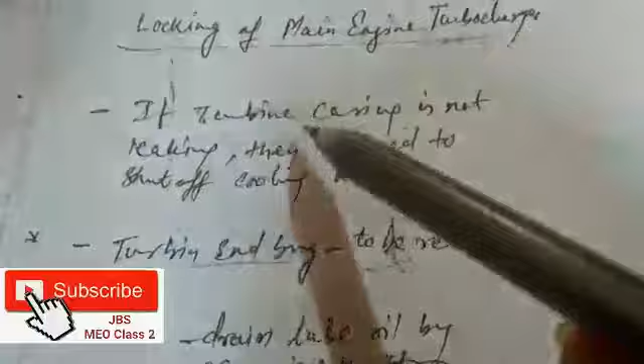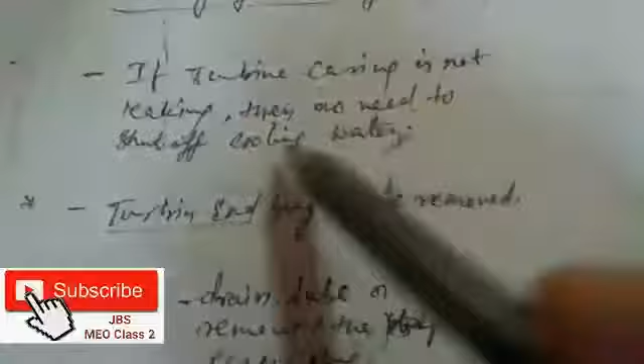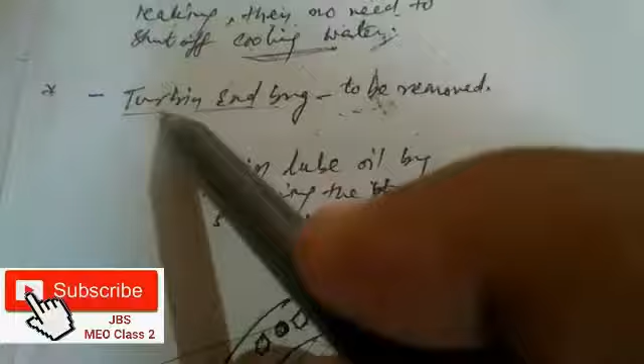So let's go. The first point which we should take care of is, if the turbine casing is not leaking, then we need not shut off the cooling water. And the second point is, we have to first remove the turbine end bearing before locking the main engine turbocharger.

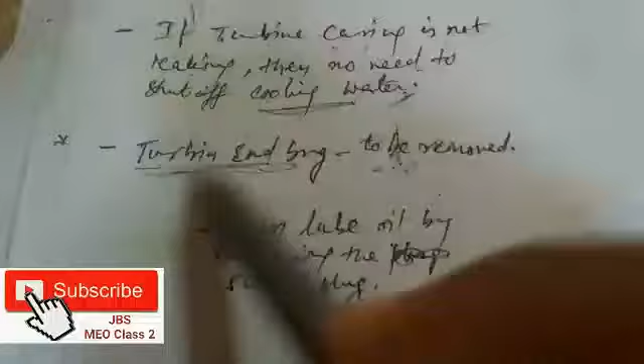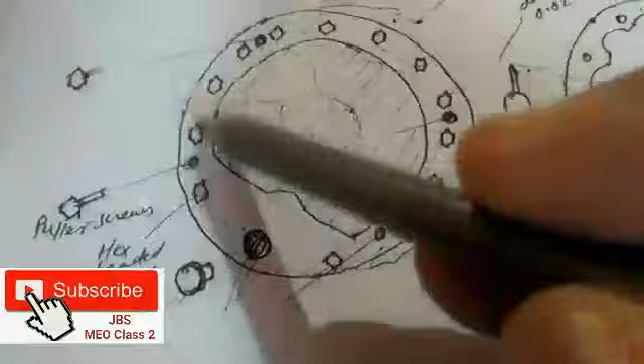So first of all, we will drain the lube oil by removing the screw plug. So here is the screw plug. We will remove it and drain the oil. Now friend, this is the turbine side bearing space cover, and these are the hex headed screws.

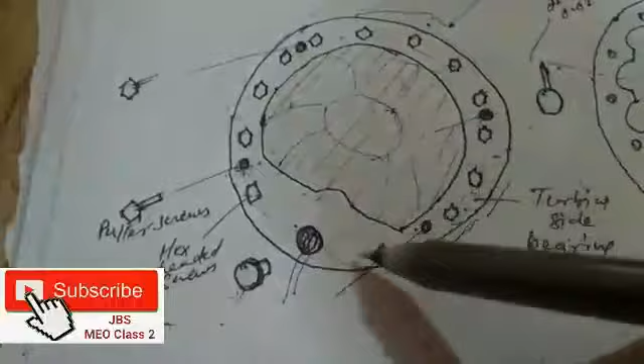And these are the 4 holes as you are seeing, 1 2 3 4. These 4 holes will be having internal threads, and into these we will be inserting the puller screws, and we will tighten them oppositely, and this turbine side bearing space cover will come out.

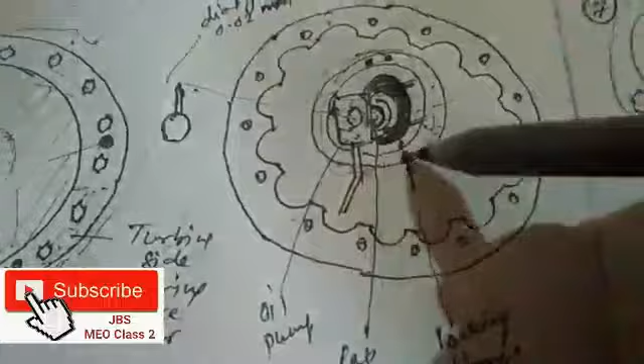After this comes out, the internal will be looking like this. This is the oil pump, and after the oil pump there is a cap nut, and this is the locking flange. Please try to remember this part, because it's a very useful part where locking of the main engine turbocharger is concerned. So this is the locking flange.

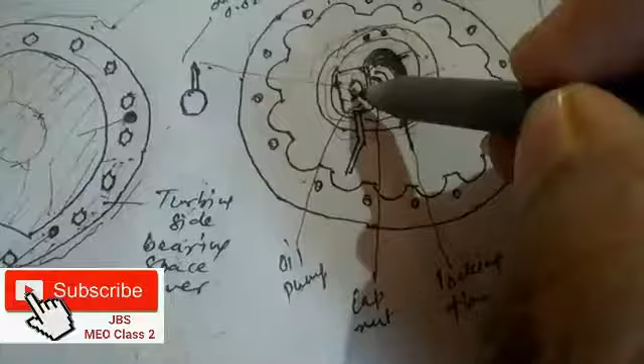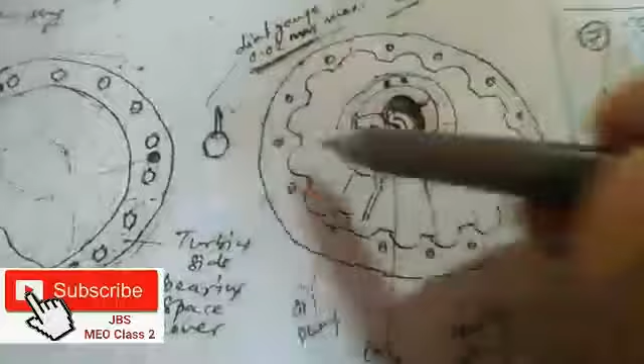And before that, at the center of the oil pump, we will measure with the dial gauge the radial displacement. Max reading is 0.02 mm. That is the radial displacement. So we will measure with the dial gauge the radial displacement of the center of the shaft. Now after that,

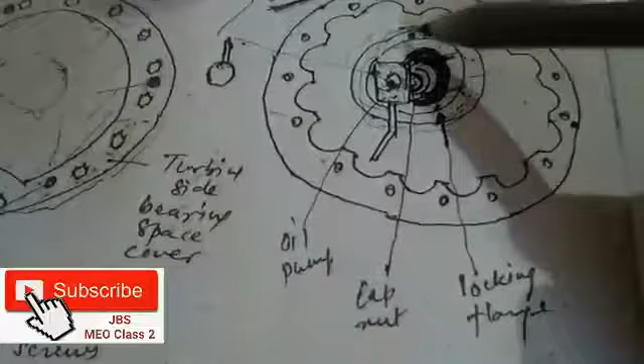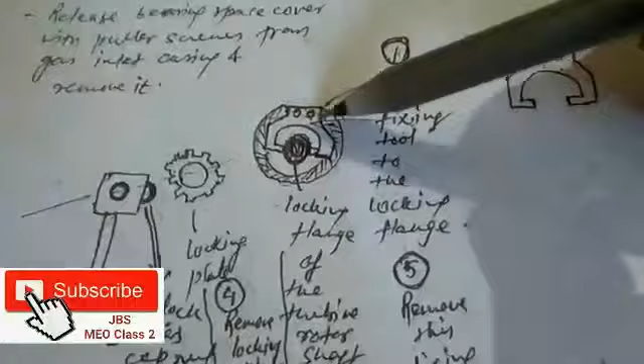now friends, as you are seeing in the locking flange, there are 2 holes here. Here we are going to fit this part. This is actually the fixing tool. Here we are having this locking flange, and this is the fixing tool. We'll fix this fixing tool onto the locking flange, and it will make contact with the shaft.

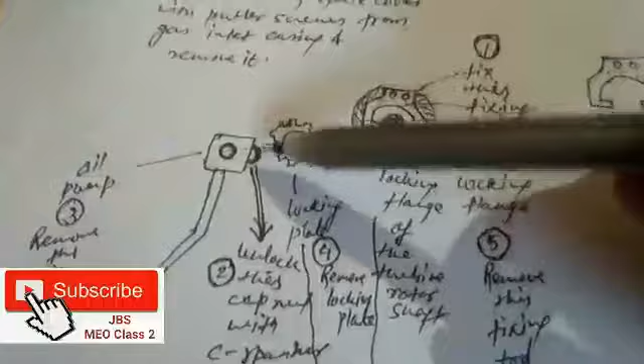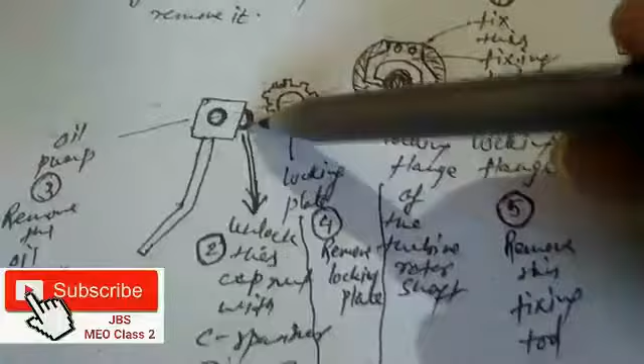Now friend, after that we will open this cap nut. For this, a special tool, the C-spanner, will be required. With the C-spanner we will be unlocking this cap nut, and after that this oil pump will come out, and then we will remove this locking plate.

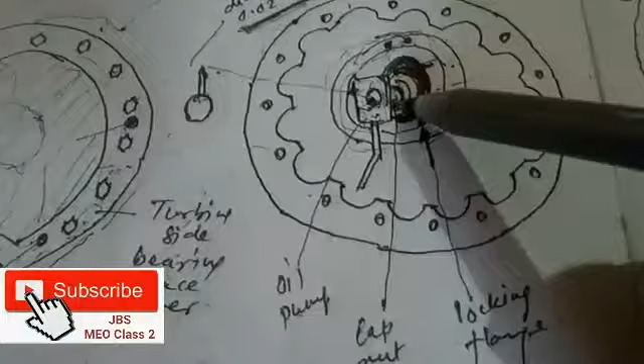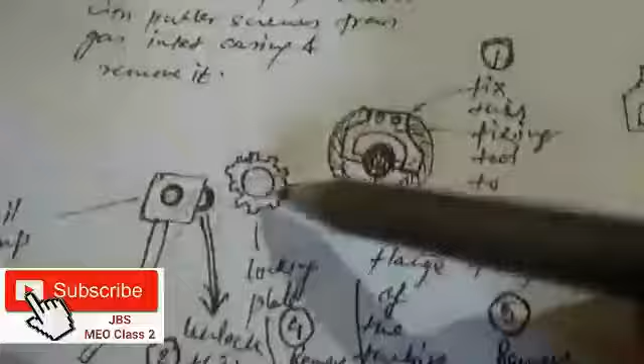So the sequence is here. First we fit the fixing tool here, and that fixing tool will hold the rotor. After that we remove the cap nut and remove the oil pump, and the oil pump will come out. After that we will remove this locking plate, and when the locking plate is removed, we will remove this fixing tool.

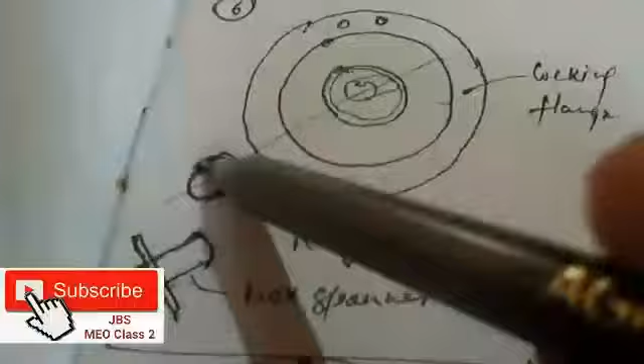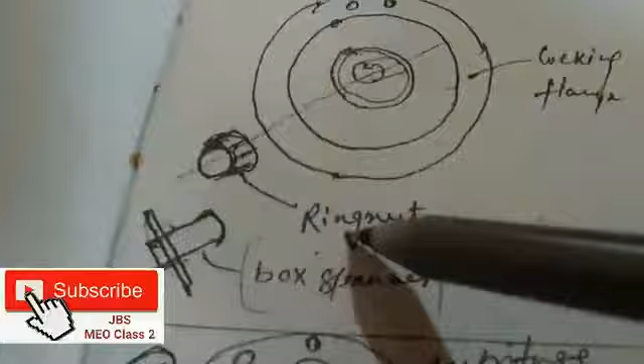Now friends, this is the same locking flange. We have removed the fixing tool from here. We have removed the oil pump. Now on the shaft there will be a ring nut. With a special tool, that is the box spanner with a Tommy bar, we will be removing this ring nut.

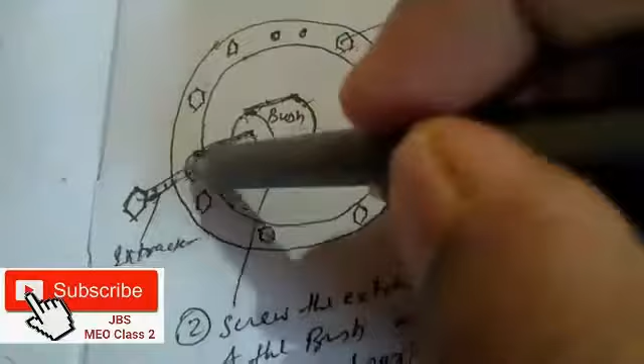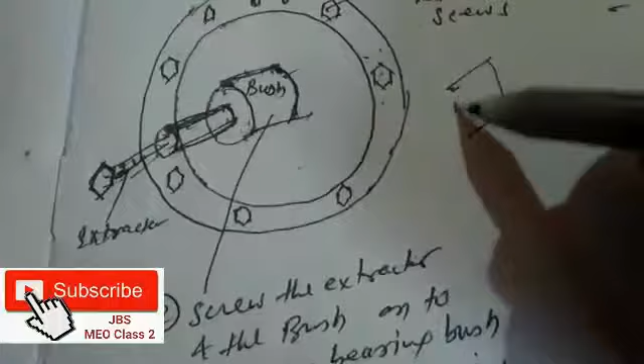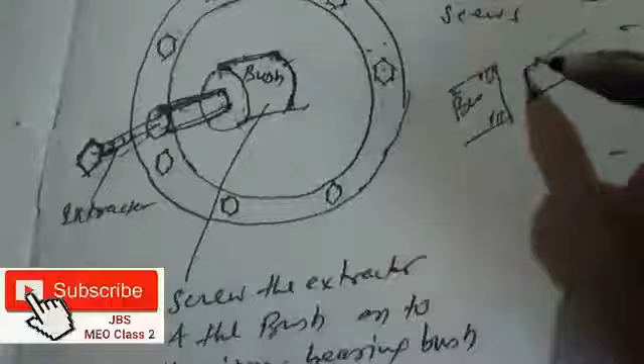Now friend, after the ring nut is removed, onto the shaft we will mount this extractor tool. This extractor tool has a bolt, and this is the bush. This bush will be having internal thread. Now this is the shaft. On the shaft the bush is there. On this bush the bearing is sitting.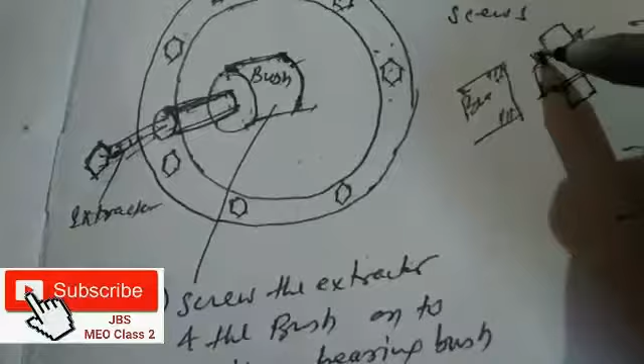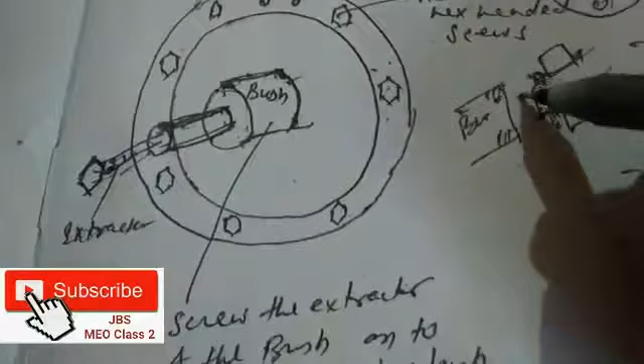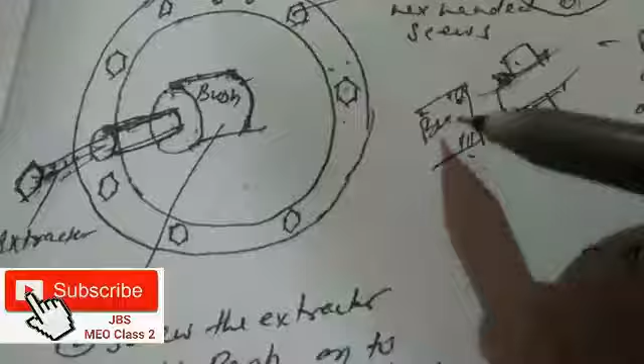So this bush will be having external thread. This internal thread will get fitted onto the external thread of the bush, and when we tighten this extractor tool, this bush will come out. Along with the bush the bearing will come out. So that's what we are doing here, and the turbine side rotor bearing

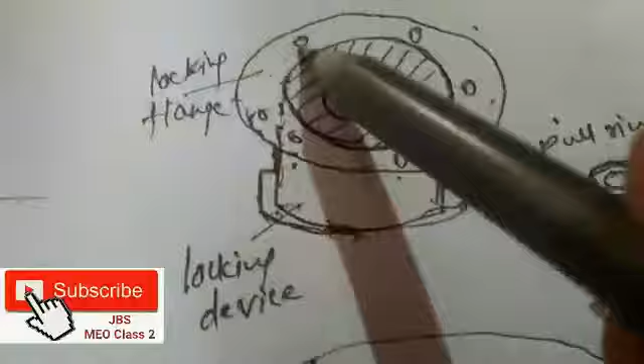comes out. Then we will remove the hex-headed screws of the locking flange and remove this locking flange. Now friends, as we have removed this locking flange and the turbine side bearing along with the bush, we will take this locking flange out, and there is a locking device.

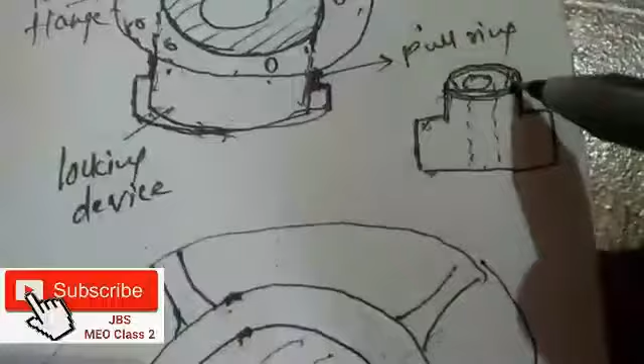Now this is how the locking device looks. It has a step here, and this is called the pull ring. The whole thing is called the locking device. On this we are going to place the locking flange. We are going to press this locking flange onto this locking device, and it will sit over this pull ring.

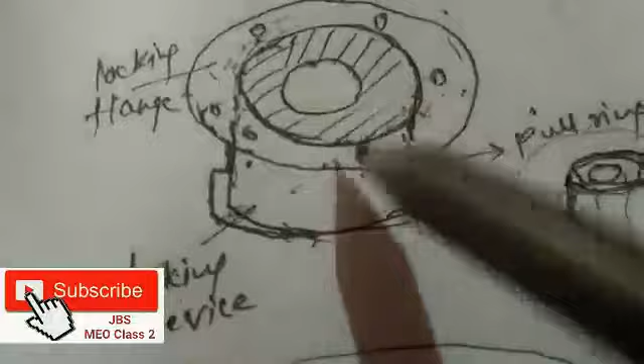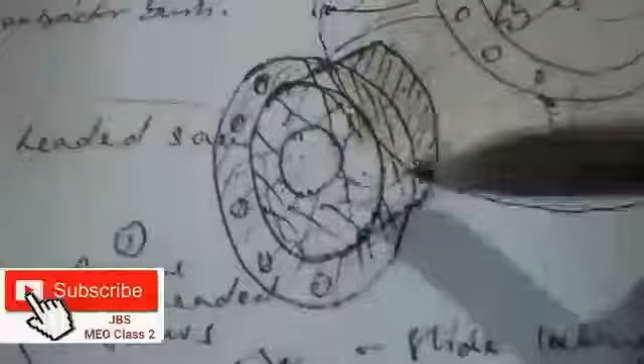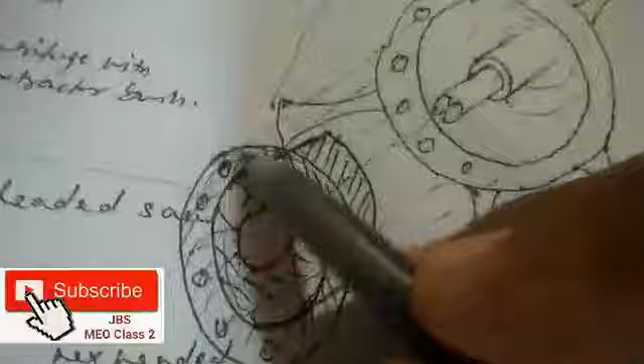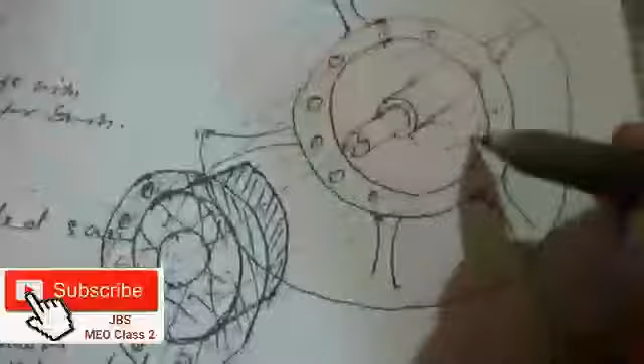After fitting this locking flange onto the pull ring, we will slide this locking device over onto the shaft, and after that we are going to lock it. This locking flange will be tightened over here. After tightening, this locking device will hold onto the shaft along with its grooves, so it will prevent further rotation of the shaft.

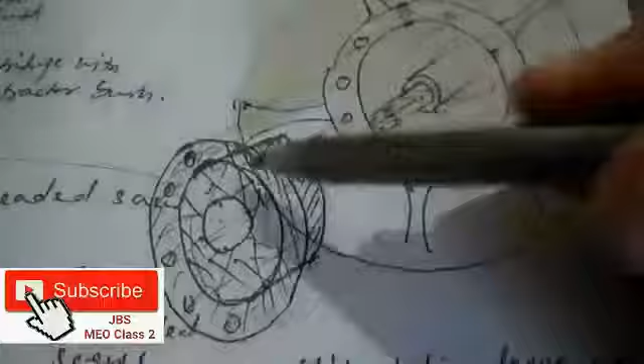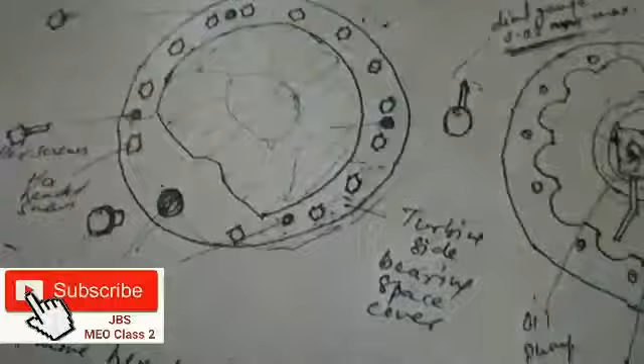After we have put this locking device along with this locking flange, and we have tightened all the hex-headed screws, we will put back this bearing space cover which we had taken out. So friends, I have tried to keep it as simple as possible.